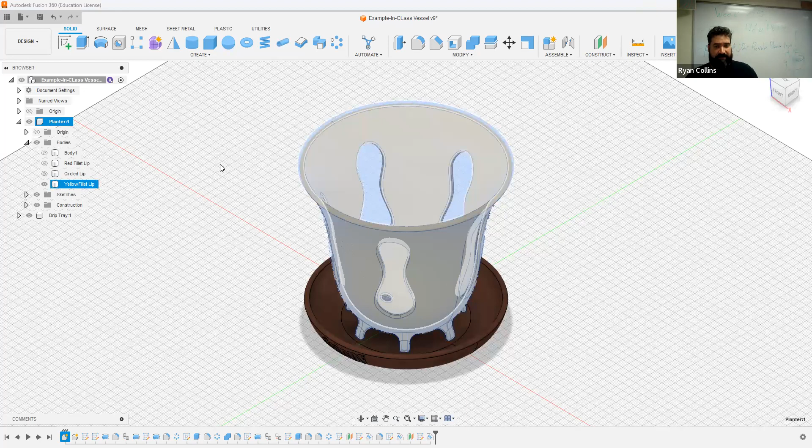Now, when you do this, you do want to actually select the actual body, not the entire component, because like this one, I have multiple bodies. Some are hidden right now. If I select the entire component, it's going to try to fuse all those together and just cause problems. Only select the body you intend to print. Go to File, go to 3D Print, deselect the print utility. As is fine. Great. Yep. Keeps doing that.

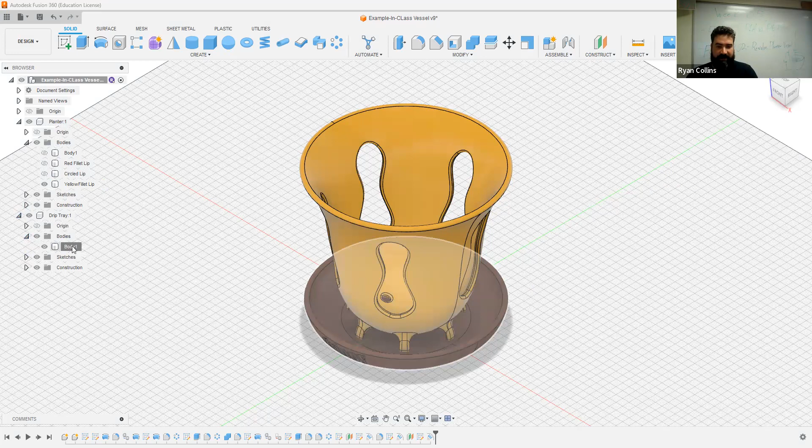And the whole thing, these are different components. We are exporting these as different things. See, I forgot to label this. So let's say your drip tray. There we go. So labeled, great. Select the body, File, 3D Print. Okay. Save. Okay. Now let's swap over to the slicer.

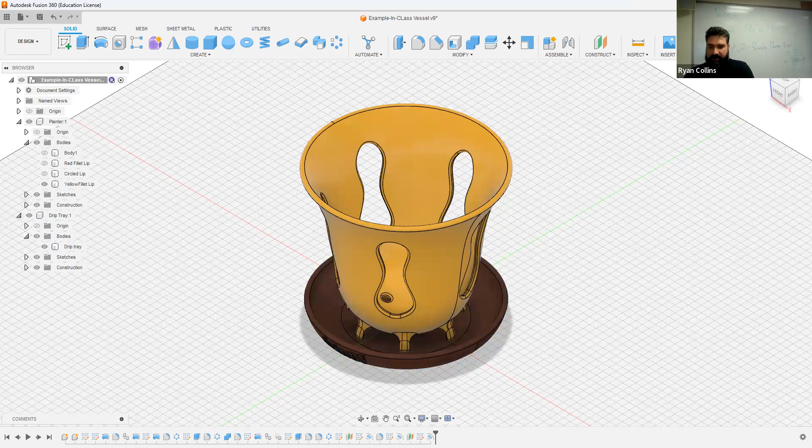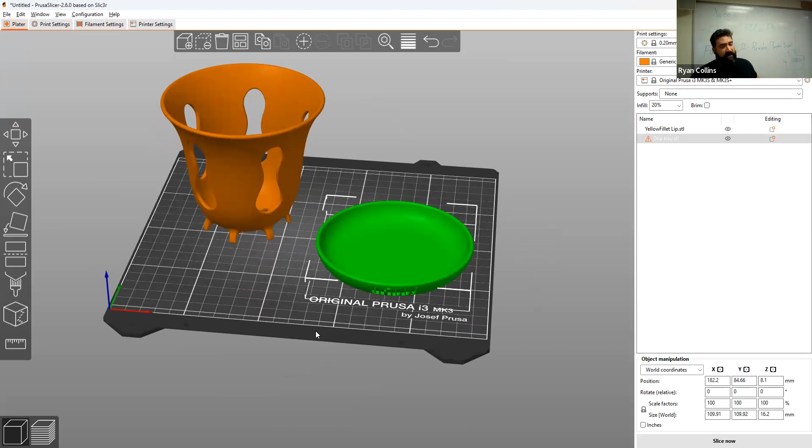So we got PrusaSlicer open. There we are. So let's drag and drop these components. Now, you may or may not be able to drop both of these at the same time. Let's see how large this is. Dropping in, dropping in. Now, right now, you cannot print this like this. Hit the auto arrange. All right. So they both fit on the plate or tray. Great. You may or may not be able to print these both at the same time, depending on how consistent your printer is printing on the bed.

I have found sometimes when you have larger flat objects like this, it's best to split these up into two separate prints entirely, because if one's printing great and the other one starts to lift, now you've ruined both objects, or not ruined, but now both have failed. So if you are printing individually, yeah, you got to come back and reset the printer, peel off, start it again, but at least you finished one print.

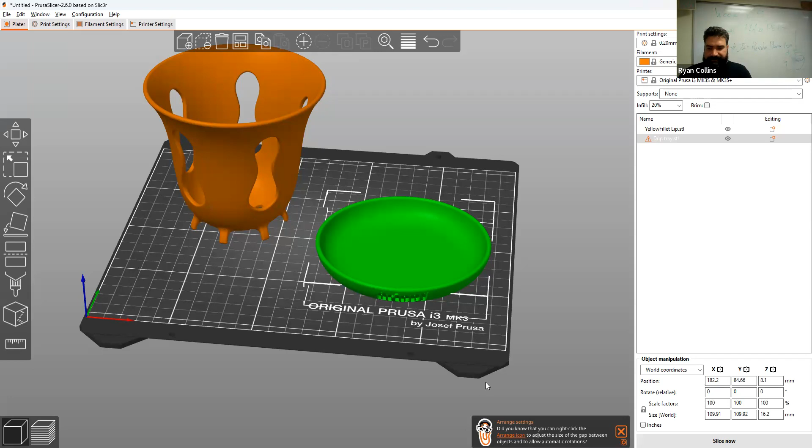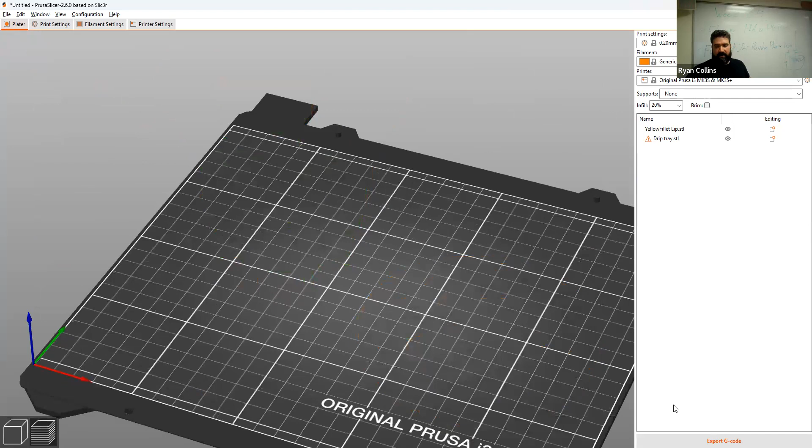All right, so the tray, that's going to work pretty well, except for that text. The planter, however, that's going to be weird. So we haven't messed with this yet. You need supports. If you try to print this, and I'll show you, go to Slice now, just as is. You're going to get warnings, detected print stability issues. You're going to have all kinds of overhang issues. The ones in blue, that's your issues.

Overhangs are things that, it's a curved surface maybe or whatever, but it exceeds the safety perimeter, just meaning that it exceeds how far up those lines can work. Because up to a point, it's kind of just printing in space. It just needs a little support. And we all need a little help.

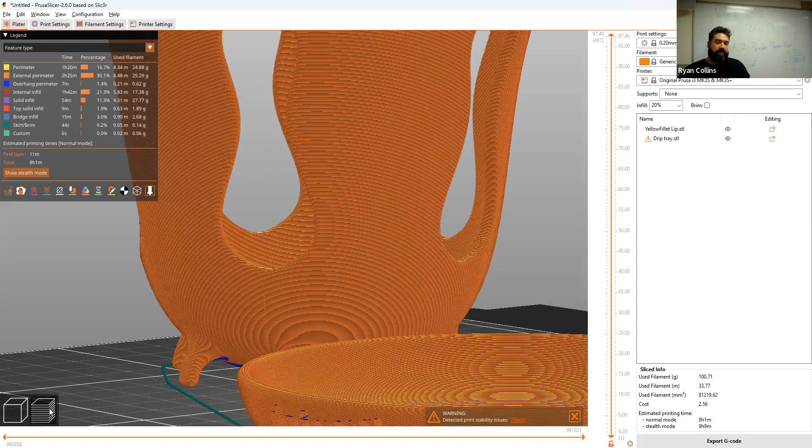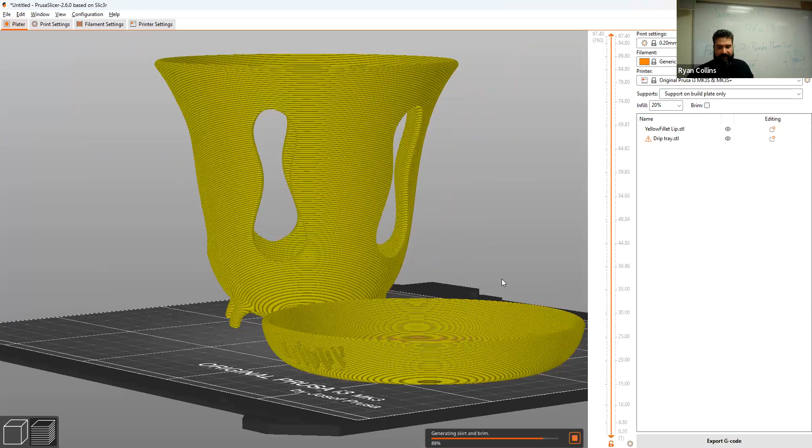So go back. You go from the stacked symbol in the bottom left-hand corner, back to the solid cube, solid objects. There we are. To supports. First, let's try from build plate only. Select there, hit slice now. From build plate only, it's only going to create supports from the base up. Okay, cool. That's actually less terrible than I was expecting. It has created supports all the way up on these holes here, as well as down here on this tray, and helping to support the text.

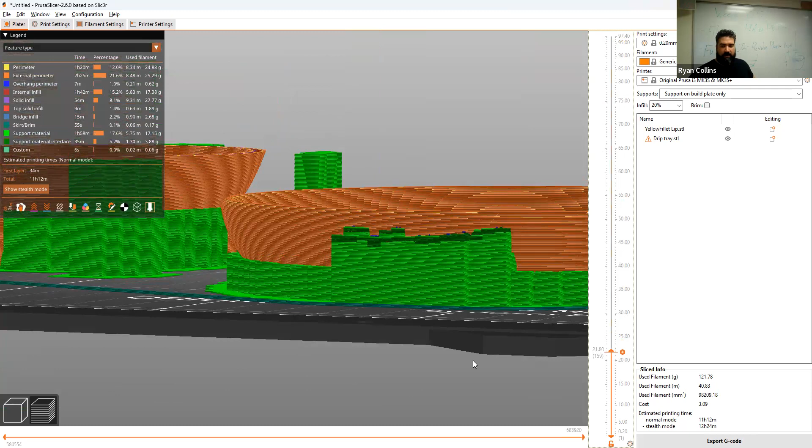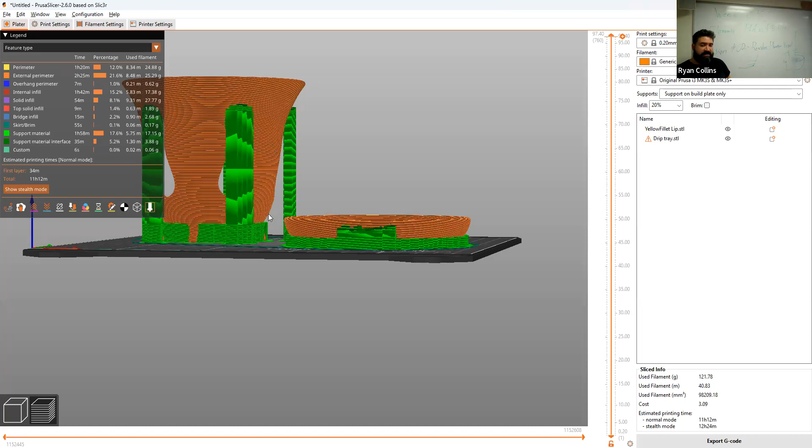Now, you can find ways of minimizing this by adjusting the profile. So let me kind of go forward here. If I made the profile of this bowl a little less shallow, a little less of that shallow sweep, made it a little bit more straight up and down, or just a little bit of a sharper curve, you won't need supports as much. Same thing with the vessel. The vessel's not too bad, actually. That actually works pretty well. If I didn't have these holes here, it probably wouldn't need supports except for on the bottom.

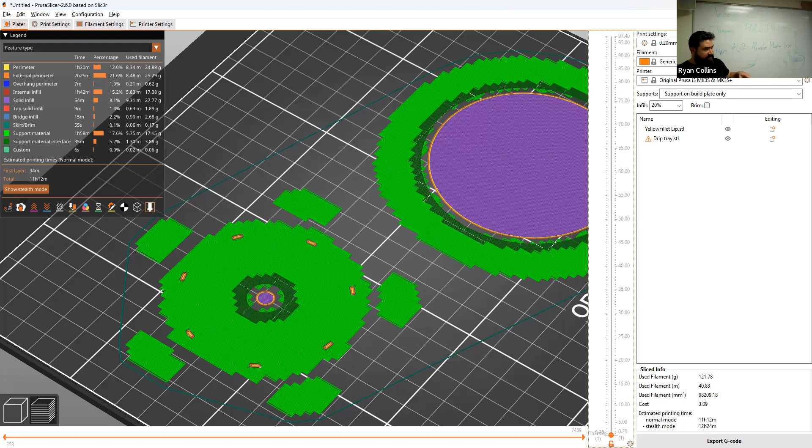Bottom, obviously, because as I slice it down, zoom in here, you can see, yeah, I got the bottom of the vessel, and I get to a point where it's just the supports, because it only makes contact at that little dot there at the bottom. So obviously that means that if you adjust your vessel as well to be more of a consistent flat bottom or something like that, you won't really need as many supports. But honestly, that's not bad at all. However, do have a look at the print time. That is 11 hours, 12 minutes.

That doesn't mean you're wasting 11 hours worth of material or anything. These supports are actually very thin. It's not using a lot of material. It just takes that long to make all of those little loops and such.

Now, like we talked about before, let's adjust the infill. I doubt this is going to make much of a difference. Let's go to grid, let's go to gyroid. Great. Also, let's drop the infill down to like 10%. So we did two things, see if we can adjust that. Reslice.

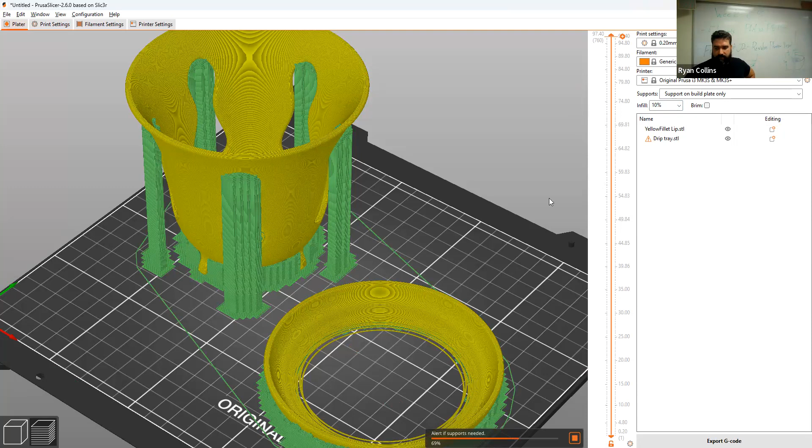Calculating. All right, that actually shaved nearly an hour off. Now it's down to 10 hours, 29 minutes. So you can make some minor adjustments and it'll take less time. You can actually adjust the density of these supports here. I don't expect you to do this, but just to note that it is an option.

So I can go down to support material under print settings. You can adjust the threshold, which is just detecting how high of a curvature it needs to automatically apply supports. Let's see here. Let's mess with the pattern spacing.

So it creates rectilinear, which means kind of cube-like back and forth, not quite a straight zigzag, goes up, over, down, over, up, over, down, over. You get the idea. I can mess with the spacing. Let's make that 5 millimeters between instead of 2. Slice again.

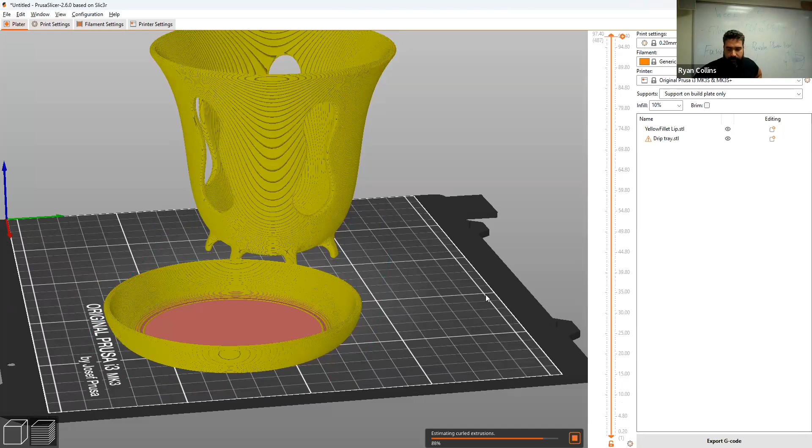Thinking. All right, it shaved 30 minutes off. So that part, not that big a deal. Actually, not even 30. It's like 23 minutes. So you can make some adjustments that will help if that kind of time is an issue.

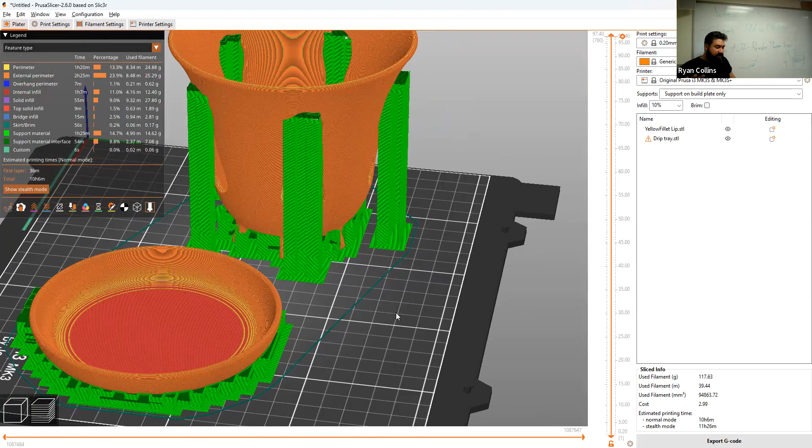The other thing is, like I said, these printers are pretty well run in. They're pretty well dialed in. One is having some issue I'm trying to solve. But with something like this, I would highly recommend making these separate files. So delete one of these. I can center it if you want. Make just the vessel one print.

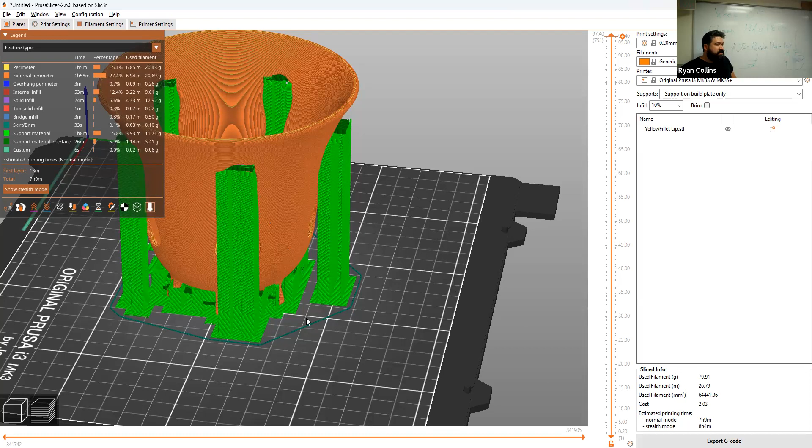All right, that's 7 hours 9 minutes, so a little over 7 hours. Do the same with the tray. Just print them separately. It'll be more efficient, meaning that way, at least if the print fails, you don't lose both objects. So with something like this, it's going to take 7 hours. The vessel, print that overnight. The tray probably will take less.

Let me delete that. Drag and drop the drip tray back in. Same settings, no change. Just under 3 hours. Okay. Print the tray, go grab lunch or hop to another class, come back, swap out, get the vessel printing overnight, you're all set. So just a couple of different ways you can play with the settings if time is a major factor.

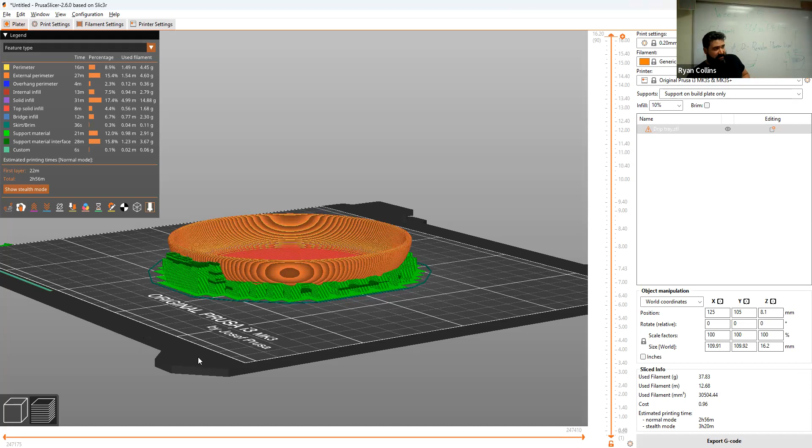Also, playing with the pattern spacing can tweak how much material you're using. Honestly, printing supports extrudes such a thin amount that it's not like you're wasting piles of material. If you have piles of supports, it is waste, but we're going to try and collect those and eventually recycle. But for now, that's pretty much the way you're going to be able to print your parts. Remember, do not print them stacked. They do need to be separate.

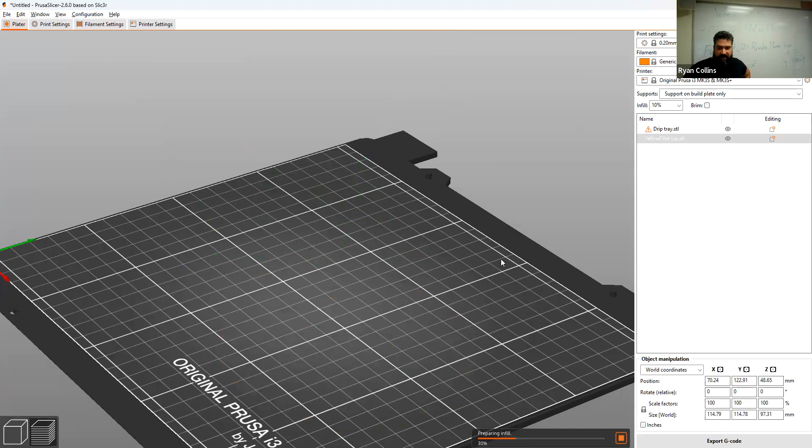Let's reslice again just to show you. No change, I didn't make any changes. You can dial down the support or the infill. We can try 5% infill, because at this wall thickness, I don't know if that'll make much of a difference. Okay, that got it down under 10 hours. So at that wall thickness, it's not going to become suddenly super weak. It's mostly hollow anyway.

So you can play with those settings to drop the time down a little bit. But ultimately, especially if you're printing overnight, it doesn't matter. As long as you stay behind and watch at least that first layer, you're usually good. That first layer is the most important part. Past that, you need supports with something more complex like this, with overhangs and hollow spaces. Sometimes you can get away with no supports. This one definitely needs them. All right.

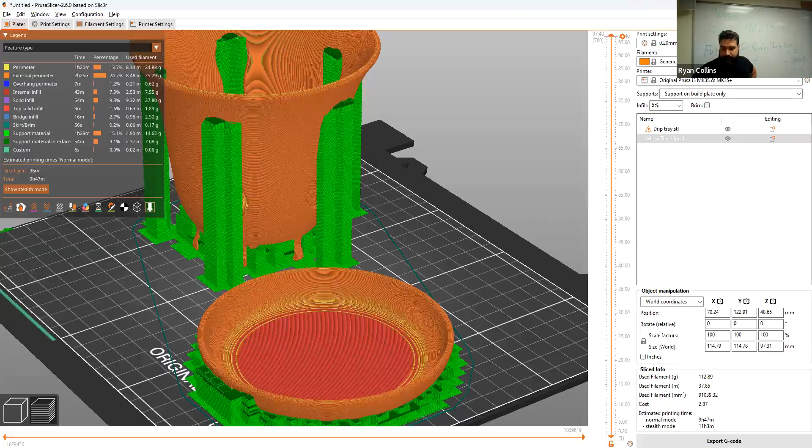And that's pretty much where we're at. So good luck with it. Ask if you need help.